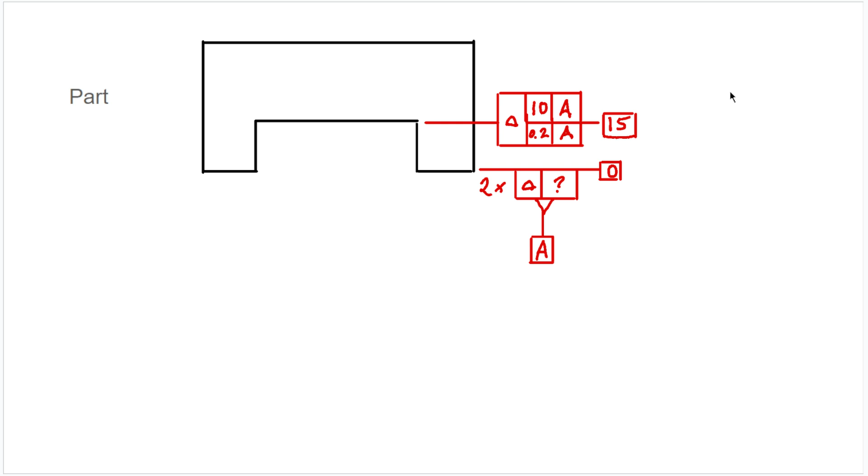So let's say someone's tasked with creating a go and a no-go gauge for inspecting this feature here. They go through and do the math and find that the go gauge needs to be 10 millimeters and the no-go gauge needs to be 20 millimeters. So this is the gauge that they come up with. And they want to save money, so they give it a really big flatness tolerance on the Datum A, but they want a very tight overall tolerance, so they give it a profile of 0.02.

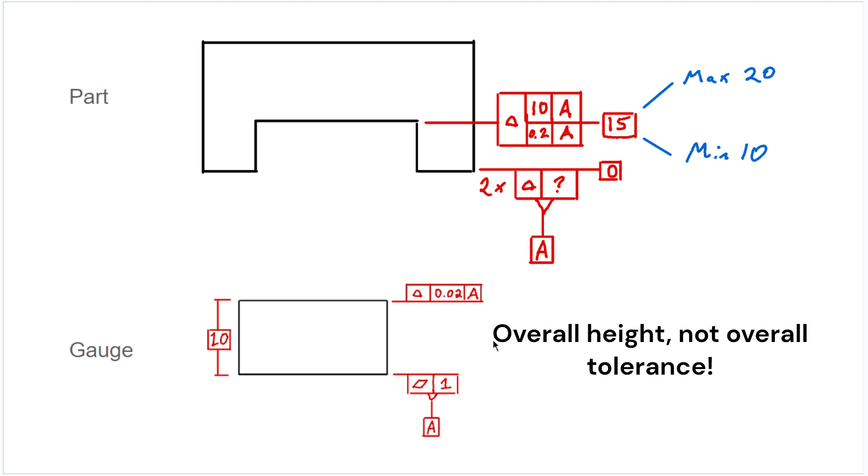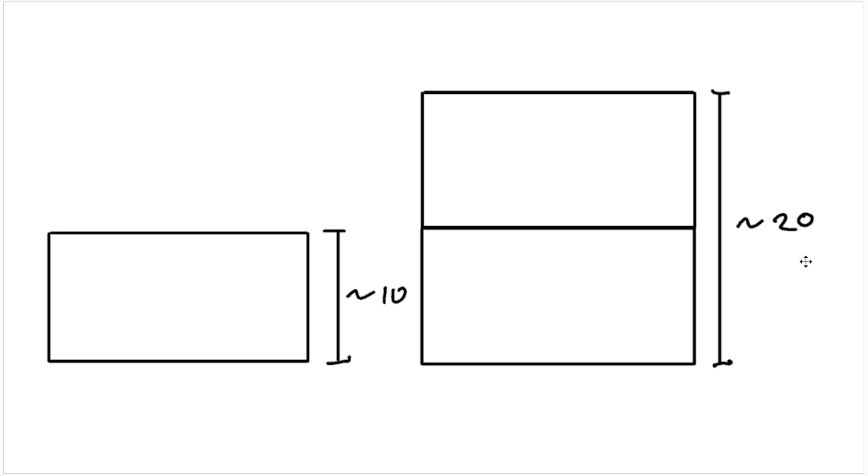And someone has the bright idea, well, we're getting one gauge block that's going to be really, really close to 10 millimeters tall. Why do we make a second no-go gauge block when we can just stack two go gauges on top of each other and get an equivalent height of what should be really close to 20 millimeters? This idea that they had is actually pretty common in the inspection world. People ring together gauge blocks all the time, but in this case, it was a bit of a problem, and it'll become clear soon.

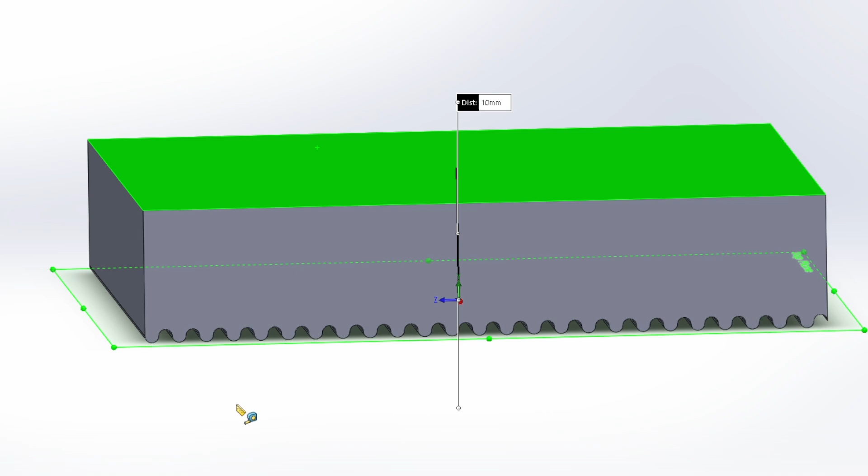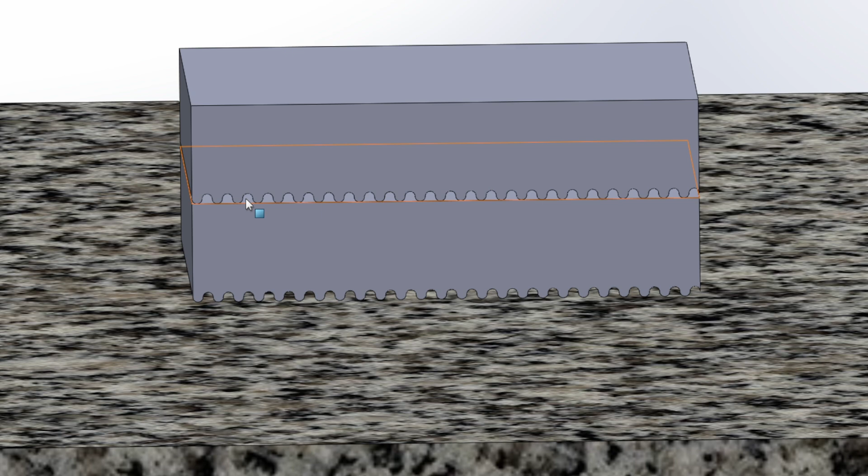So you can see the enormous variation in the Datum A surface, but the height came in pretty bang on at 10 millimeters. Assuming that there's no instructions on the gauge or that come with the gauge about how to stack them, you might end up with a few different permutations and orientations with the gauge blocks. The first one might look something like this, where you've got the Datum A surface on the granite, and then the second part has the Datum A on the profile side of the first block, in which case there are no issues.

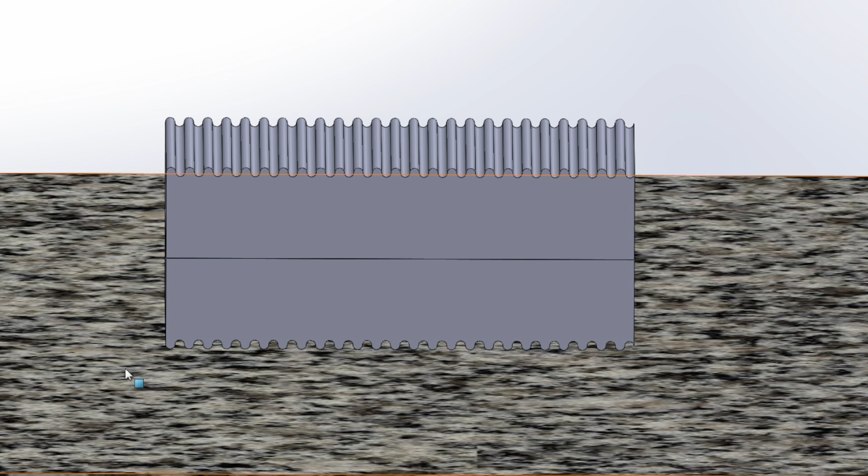The actual mating envelope of the two parts, or the assembly, is 20 millimeters. Another scenario might look something like this, where you've got, again, Datum A on the granite, and then you have the two profiles facing each other. And in this case, once again, the actual mating envelope of the two parts together of the assembly is 20 millimeters. We haven't gone over all the different ways these things could be stacked, but here's the interesting one and the name of the video.

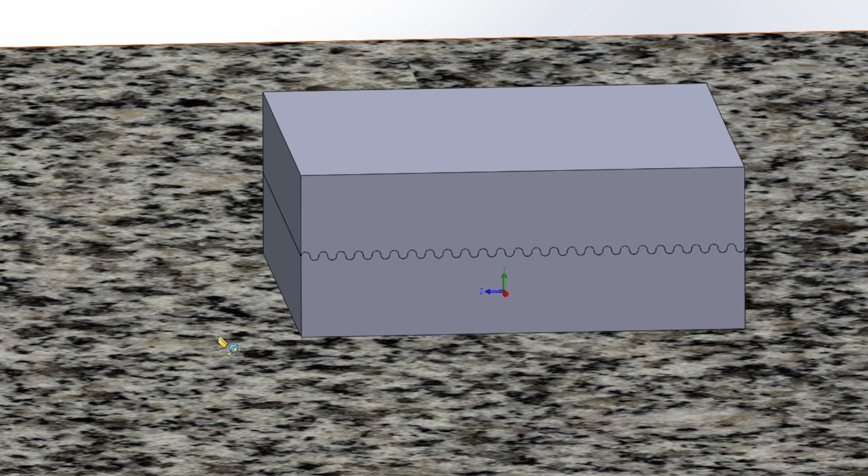This is the two Datum A surfaces with their extreme surface variations facing each other, and because those surface variations happen to be complementary, when you measure the actual material or the actual mating envelope of the two parts, you actually get 19 millimeters. So what's going on here? Well, this is one of the oddities that arises when you take measurements from an individual part and try to apply it to an assembly.

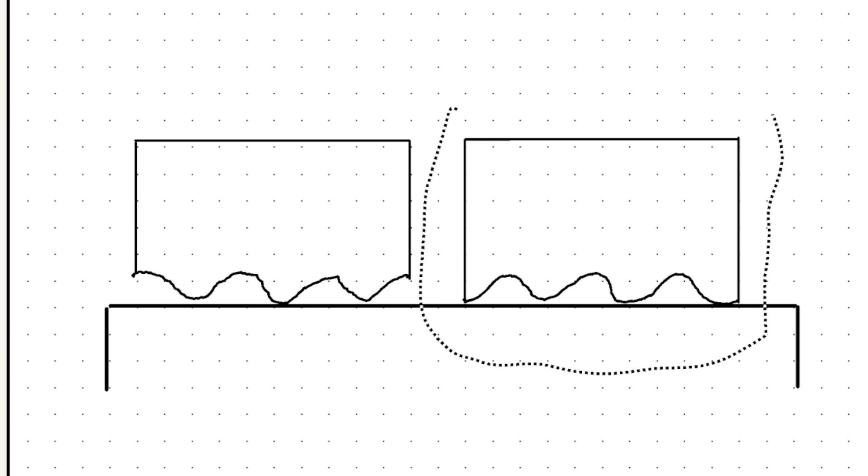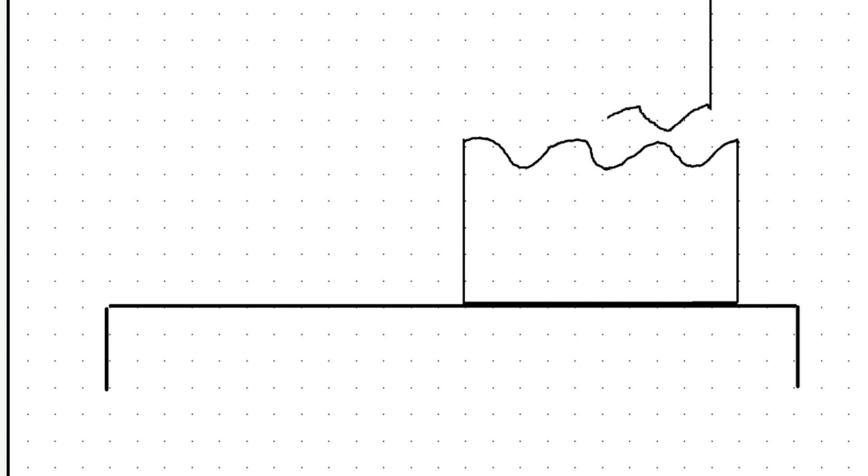Because when we're measuring the height of this individual part, we're not taking into account these low spots. We only talk about the high spots, the three high points that contact the gauge surface. Unfortunately, the assembly cares about those low points, because you may have a mating part that interacts with it in an unexpected way.

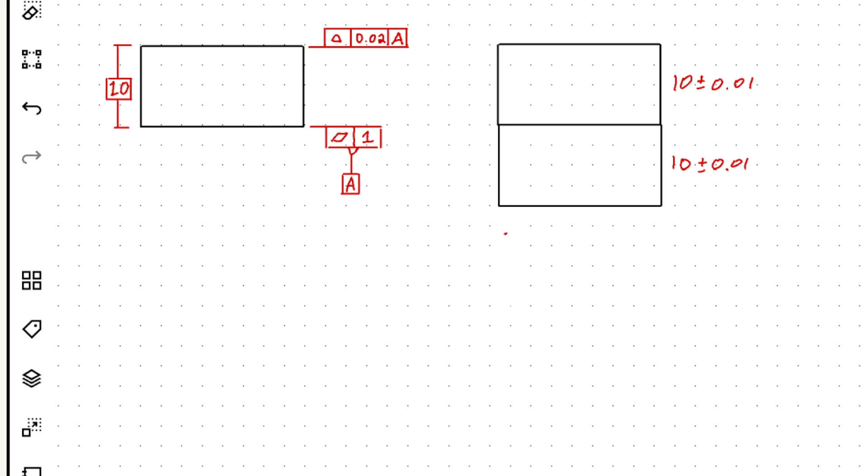So I think the most common way people would go about doing a stack up like this to figure out the math is that they would say, okay, well, the nominal on my parts is 10 millimeters, and I've got a profile of 0.02, so converting that into plus minus, I would say this is 10 plus minus 0.01, and then it's the same for this one, it's 10 plus minus 0.01. And then doing some simple addition, we'd say the overall height is 20 plus minus 0.02. Following this math, we could say that we've got a max overall height of 20.02 and a min overall height of 19.98. But this is not quite complete.

Let's say we put a note on the two blocks saying, this side's Datum A. They need to be facing each other. What we need to do, the max is correct, but we need to take the minimum and then include the datum overlap. So in this case, the datum overlap is pretty simple because the parts are the same. We have to say basically the minimum from this plus minus the overlapping flatness, which is as much as 1 millimeter. So minus 1.

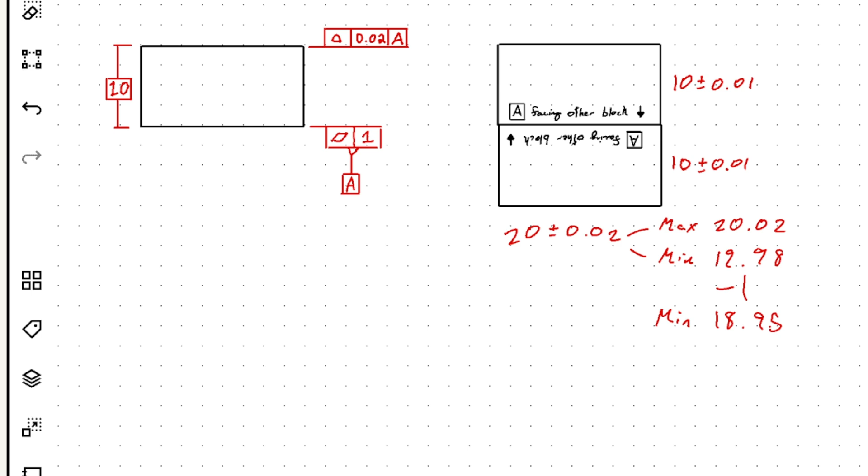So the new minimum, or the correct minimum, is actually 18.98. So I can imagine the question people are thinking: well, what if I put a note on this block and I say, don't stack the datum A's together, keep those surfaces apart? What if I do this scenario where I do the profiles together, or what if I do the datum A and the profile in contact with each other?

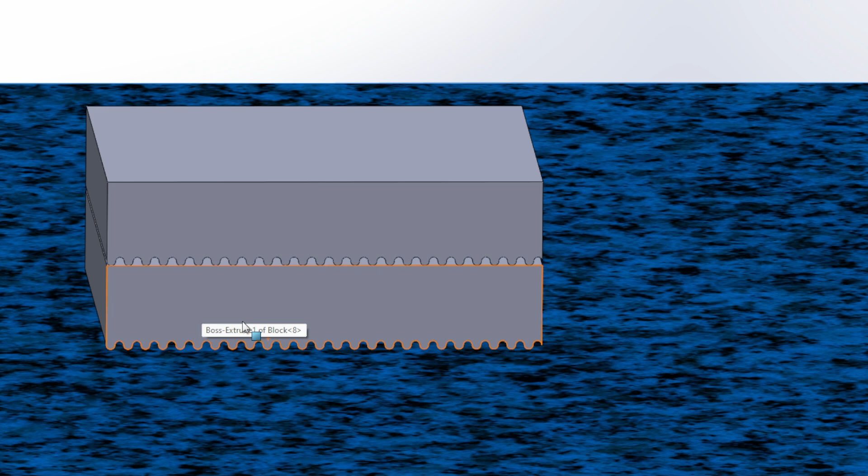Is there overlap? Is there datum overlap? There, I've got a datum, but it's not touching another datum. And the answer to this question is fortunately no. And okay, well, why is that? Let's really read through what this is saying.

So this is saying we place this block down on a simulated datum with the flatness side down on the simulated datum, and then 10 millimeters up, this top surface can vary within a profile of 0.02. So there is a boundary on either side, 0.01 millimeters of this nominal profile that this surface can vary within. And we've already taken that into account over here with the plus minus. So there would be nowhere for this datum A to violate that surface or to overlap with that surface.

There's a hard boundary. So if this surface is at the minimum material, we don't measure a surface profile from the top unless it's a tangent plane. But this surface cannot do this, which is the only way we'd be able to get something like datum overlap, or surface overlap, I guess it would be called in this scenario.

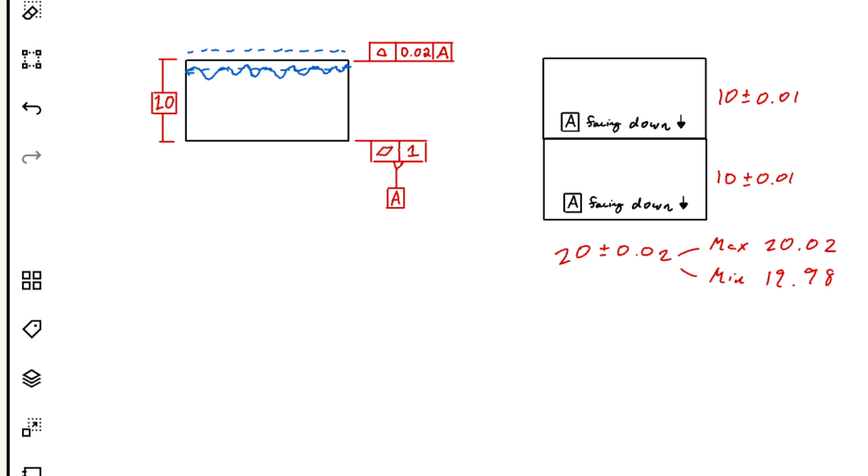Now, what is the mathematical rule? So let's say we've got two parts, part 1 and part 2. Part 1 has an overall height measured from its datum surface of a plus minus x, and the datum surface has an allowable variation of m. And then part 2 has a measured height from its datum surface of b plus minus y, an allowable surface variation of n. So if we have those two datum surfaces overlapping, we can have a maximum height of the nominals of the two, a, which is the nominal of part 1, plus b, which is the nominal of part 2, plus the sum of the two tolerances. So that's our maximum allowable assembly height.

But the minimum allowable assembly height is the sum of the nominals, a plus b, minus the tolerances, minus the lesser of the surface variations n and m. So if part 1 has an allowable surface variation of 1, and part 2 has an allowable surface variation around the datum face of 2, well, you only subtract 1.

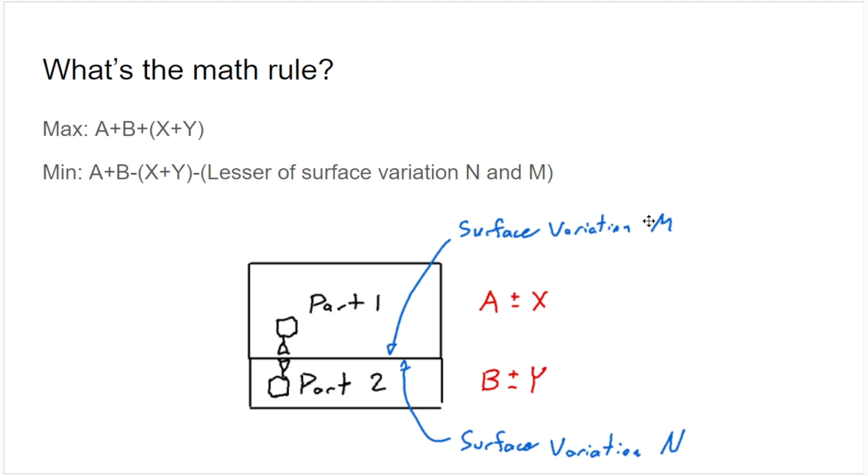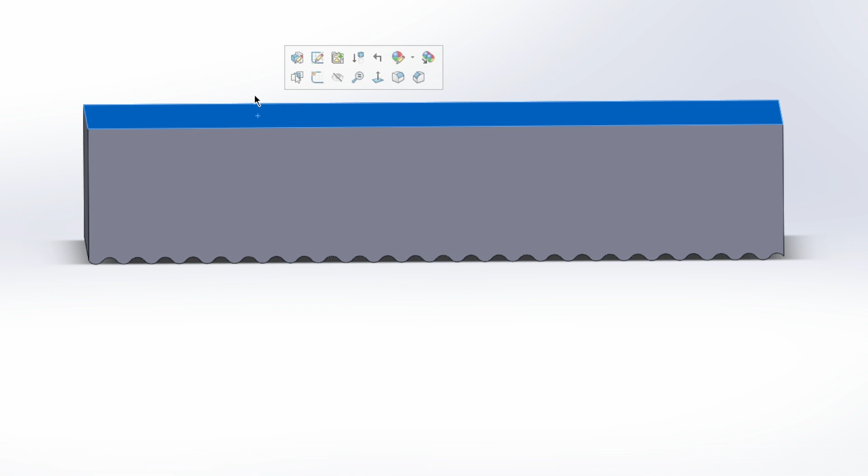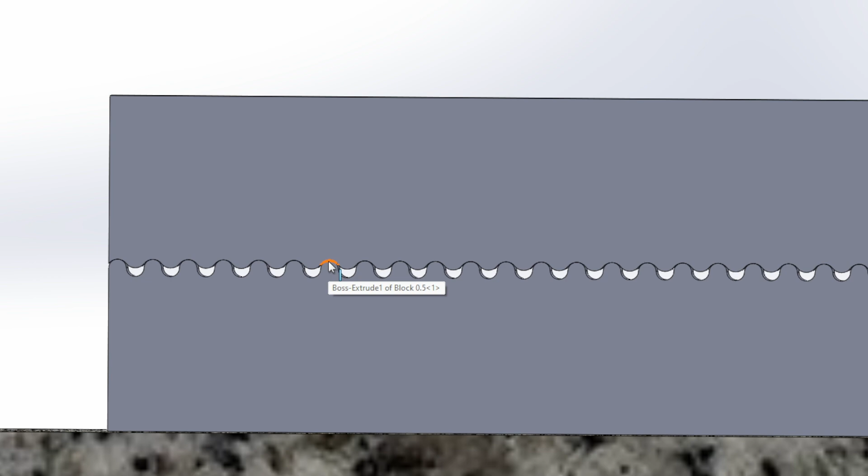I'm going to try and drive this point home with one final example. Let's say we had them make a second gauge block, but this time the flatness of the datum A is 0.5 millimeters. So they produce the part, and again, they basically nail the overall height. Exactly 10 millimeters, and they decide to use up the entire allowable surface variation on the datum A. In the assembly, that ends up looking like this. So we have the datums penetrating into each other, but we only have them overlapping by the lesser of the two allowable surface variations, which is 0.5, which in this case means that we have an overall height of the assembly of 19.5 millimeters.

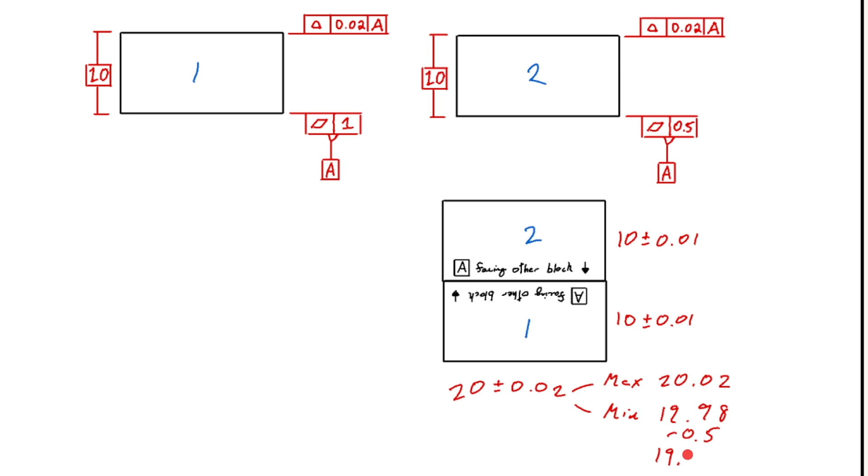Does this make sense based off of the math that we went over in one of the earlier slides? Well, we've got a maximum height of the assembly of 20.02, and this doesn't change. And then we've got our minimum of 19.98, and then we include the lesser of the two surface variations. So in this case, 0.5. So we subtract 0.5, which gives us 19.48 as our minimum height.

Hopefully your answer to this question after watching this video is yes, you should be taking this into account. I think there's a little bit of nuance there because if you're making parts with micron tolerances and your assemblies only matter on the millimeter tolerances, maybe it's not so important. But for the most part, if someone's got a micron tolerance part, the assembly likely matters on a micron tolerance, in which case this could make the difference between an assembly working and not working.